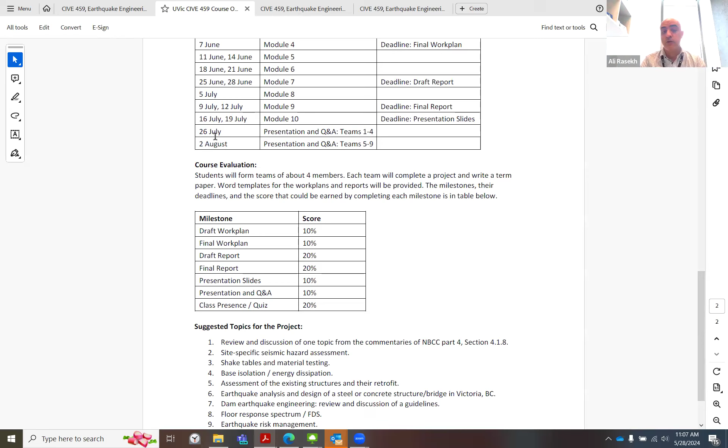Good number of students, thanks a lot, 27 strong, yeah you can say that. Behnam told me that you have chosen from these topics here, so I'm happy that I've given you enough options. Although, as I said, you could even find your own topic.

Right now, we are continuing with module number 2, which is dynamics of structures for multiple degree of freedom systems. Meanwhile, so that you confirm one more time that what we are learning here is valuable, I show you this. About an hour ago, I opened this slideshow from module number 1 that has this equation for assessing the log decrement method. That's the formal name for it, but that's a method for assessing the damping ratio for a system.

Because I have a poor memory, I keep on forgetting whether 2 pi is on the numerator or denominator, etc.

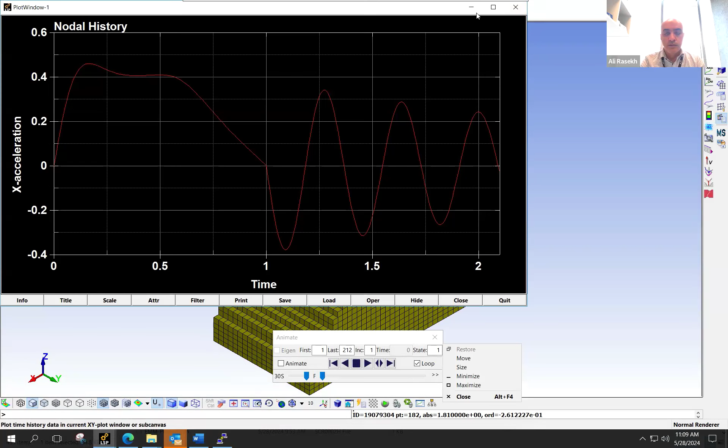So I was reviewing an analysis being done here at HDR. Let me show you here - sorry, it's too busy. This is done by my good colleagues and engineers at HDR. They are modeling a dam. I probably shouldn't say which dam or what we are doing, but it's an earthquake analysis, and this is one block of the dam. We applied damping in different methods to the system, and there is dam, foundation, and reservoir, whatever - the main model is a lot bigger than the one I'm showing here.

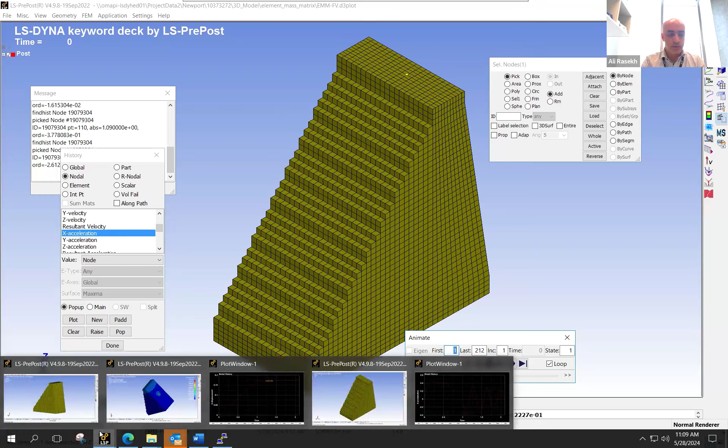I wanted, as a person overviewing this, to make sure they got the damping right. So I did a free vibration test, and the system, as you see, starting from second 1, is vibrating but losing its energy. The energy is dissipated gradually.

Number one, I was interested to see what is the main period of the structure. You see the vibration starts from 1 second. Maybe I didn't explain well - so I output the acceleration on this point on top of the dam. All I did was output the acceleration record on top of the dam after vibration, which means I slightly shaked this model of the dam and let it move, then I outputted the acceleration there.

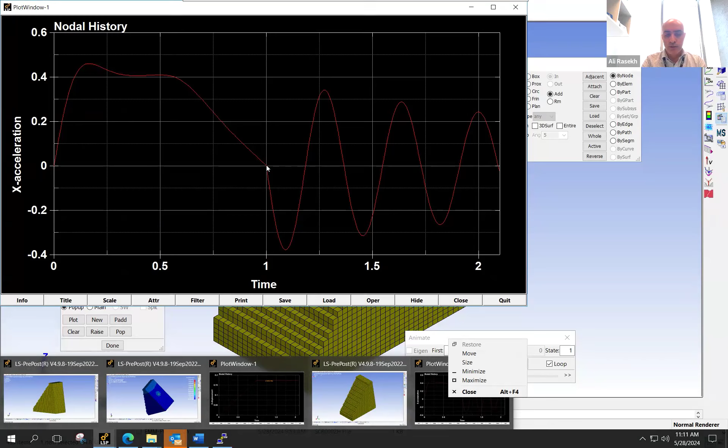I can show it again - that's the acceleration record for a few seconds. So that's the force pushing it that has caused some randomized acceleration. Then there is no force starting from 1 second, no forcing function. It goes back and forth. One complete cycle is...

It finishes at 1.37 almost, so between 1 and 1.37 is one cycle. My back-of-envelope calculation here on a sheet, just given the mass and stiffness of the system, my period was also 0.37 seconds. So that's the kind of high-level check that we do on our models.

Sometimes people call some modeling garbage in, garbage out - that's an extreme word, I never use it in real life, but sometimes it looks fancy and the outcome doesn't make sense. So I do my back-of-envelope calculation here. I get 0.37 seconds, and there was one cycle finishing in 1.37 seconds.

Then what I also do is look at the peak values of acceleration, multiple peak values. I know that equation but I don't have it on top of my memory. So it is a remote system - how can I get rid of it? No, that's your system.

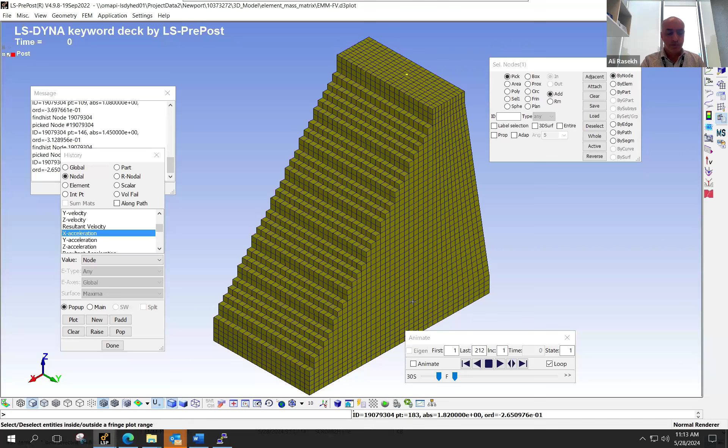Okay, I need another window here, so I will close this if I can.

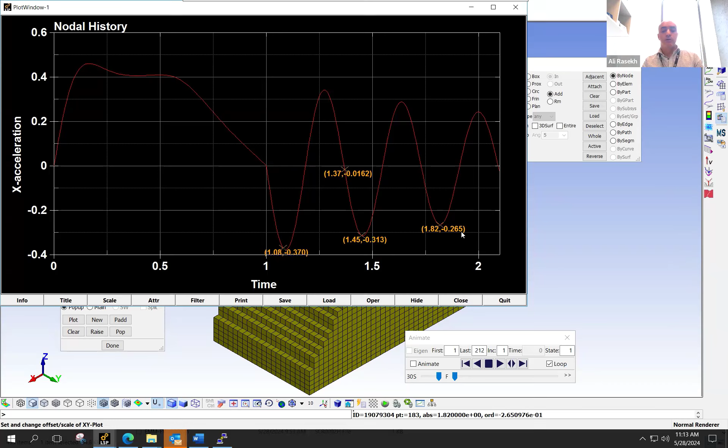I will go back to that screen - what I was saying was that I used the logarithmic decrement solution to also estimate the damping of the system, which was about 2.95%, just by reading some numbers here - I don't exactly read them. I was happy because I was expecting 3%, and if you work out these values in the equation for damping with free vibration, you'll also see they correspond to 3% damping.

I'm using the negative values here, but the absolute value is important. So use the ratio of 0.37 to 0.313, and then use that equation and I should be able to get it.

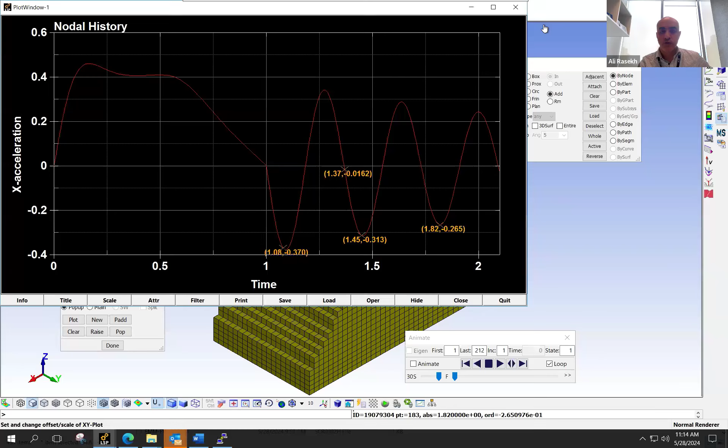How can I get out of this? Okay, let me stop sharing and share again. I think Zoom doesn't make it easy for us. Stop sharing, minimize this, now share again. Right, so I had a bunch of windows on top of each other, I couldn't really manage them.

Back to the story - I pulled out, like right now, my course notes which are also my notes at work, so I don't need books anymore. I've created a good set of course notes for you guys and I use it myself.

I went back to this equation, the log decrement method, and the values I was reading to you were 0.378 - last time I read it myself on my notes - and 0.261 in two consequent cycles. I use this equation for 2 cycles: when you have 2 cycles you divide by another 2. Here it's written for one cycle between i and i+1; if it's between i and i+2, you divide by 2 one more time. And I ended up with 3%.

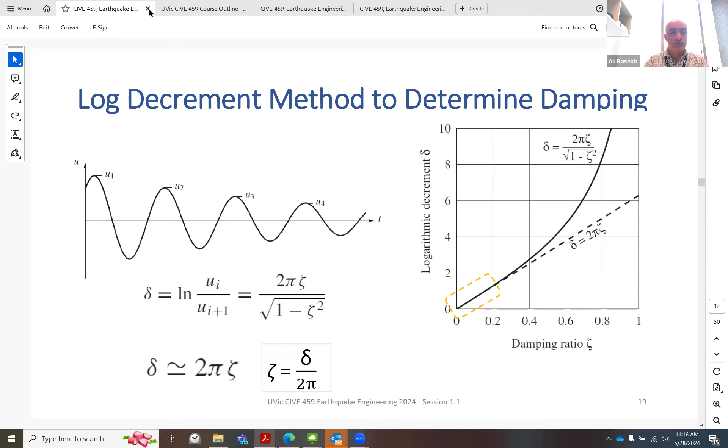Bingo, I'm happy - I think our guys have done a good job, so I can approve of that. So what I'm telling you is that in the age of high-level computing and ChatGPT, etc., still you go to your class notes and use them to verify a solution, which is super important.

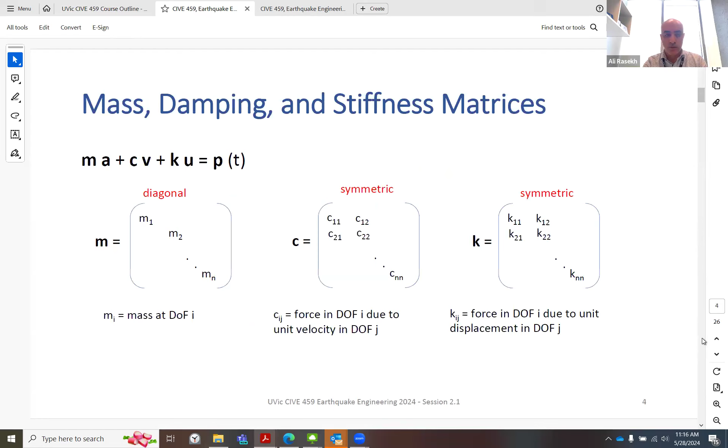Now, last time we went through this. So we visited the multi-degree of freedom systems and explained that at a high level.

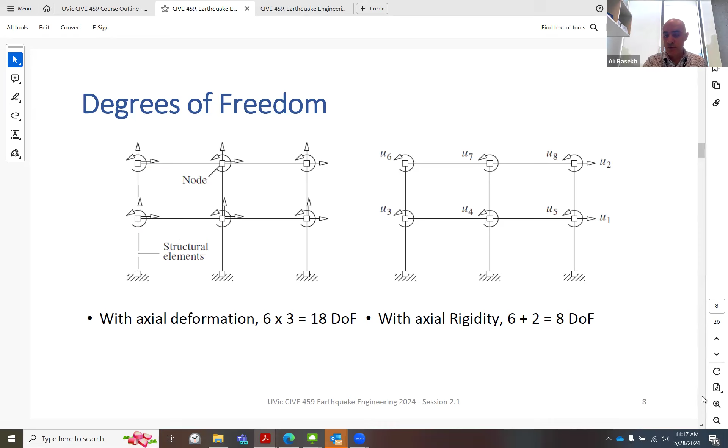Remember that there was a U total. I removed the total because it was not total anymore. So we discussed that although from statics and analysis of structures we are aware of many degrees of freedom in the system, we focus on the ones that are important to dynamic analysis, and use some method, maybe static condensation, to get rid of the unwanted degrees of freedom.

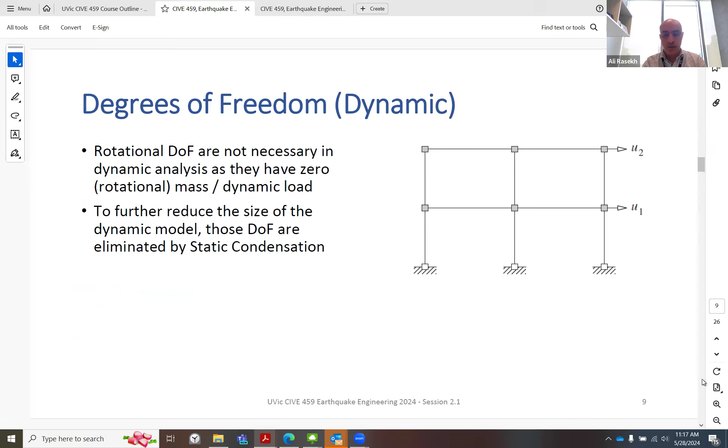Maybe when I was in college, the difference between 20 and 2 was very important, but right now the difference between 2 million and 1 million is important to save computational time. So it's important anyways. I don't generally appreciate it when people in analysis just think we have unlimited resources. The level of resource and computation capacity is increasing, but the demand is increasing twice as fast, and therefore we easily end up, in a way, with mathematical problems that we cannot solve because we get too ambitious and want to run too huge a problem.

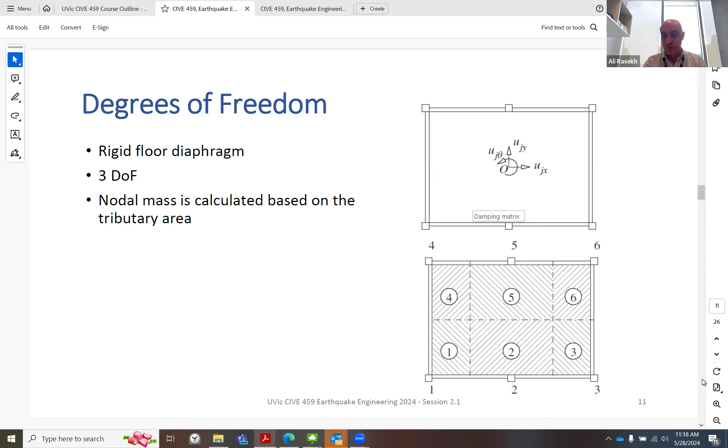Given our resources, we have limited resources, the projects have limited budgets, and at this moment we have 24 cores, which again has some limits. It's not unlimited. So in general, what I'm telling you is that your notes are important and try to at least have a high level understanding of them and practice a little bit, and they will be useful throughout your career.

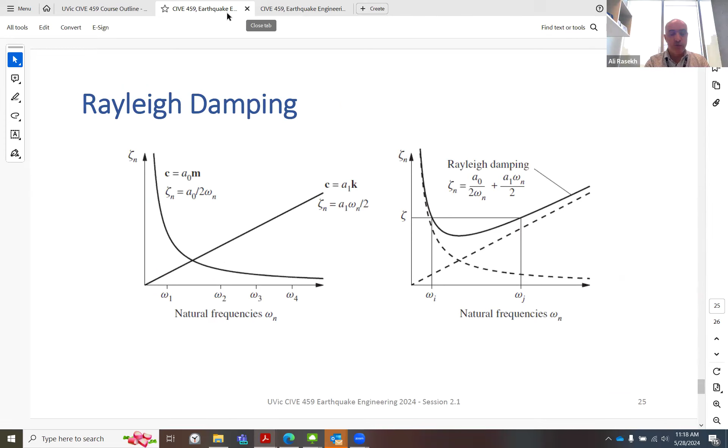I think we stopped here last time, with examples. So we went through all that, and now we are going through the examples. One second, sometimes I miss the chat, but now we can dig into the examples.

Again, slope deflection relations. A structural engineer should always have them in their back pocket, or maybe you just keep my slides for your professional life. It happens that you are worried your computer simulation is wrong and you want to do a hand calculation. Slope deflection relations are a very useful tool.

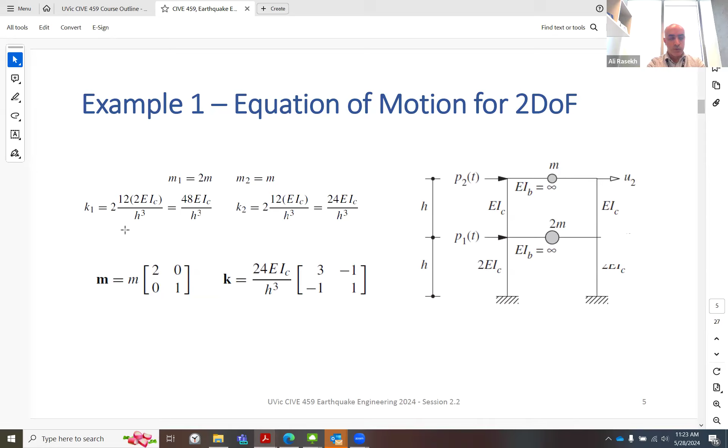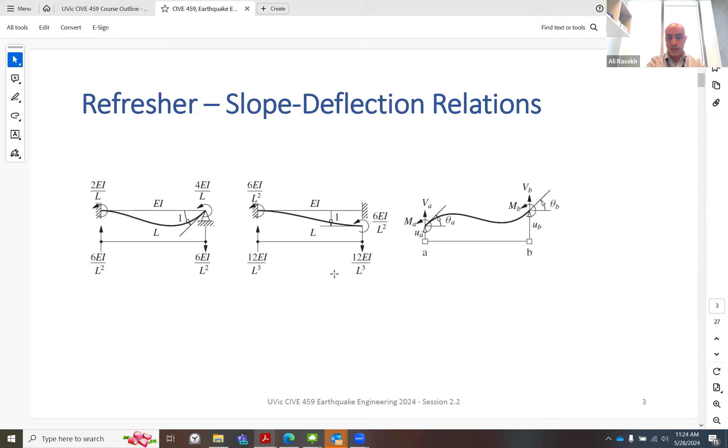The stiffness of the first floor is 2 columns. You can find it quickly from the books, using 12EI over L3 for the stiffness. It is practically the stiffness when the structure moves laterally and there is no rotation at the ends - no rotation here, no rotation here, only a unit deflection, which is identical to what we call a stiffness.

That's for this bottom floor, and this is for the top floor. The factor 2 is because there are 2 columns in each floor. We created the mass matrix quickly, and a stiffness matrix.

I didn't show this in detail, but basically for the first floor, so you can do this exercise - maybe you know it from your analysis of structures course. When you want to get this first term, imagine that all the nodes are closed and only the first floor can move. If the first floor moves by a unit, we have deflection both in this column and in this column, so the stiffness of both columns, first and second floor, are contributing. So 24 EI over H3 here, but 1 time here and 2 times here, so 3 of them.

When you want to get K22, you close this one, and only the second floor can move. Now the stiffness of the first floor is not really contributing, it's only the stiffness of the second floor. Therefore you have the factor 1 here, only the stiffness from the second floor is contributing.

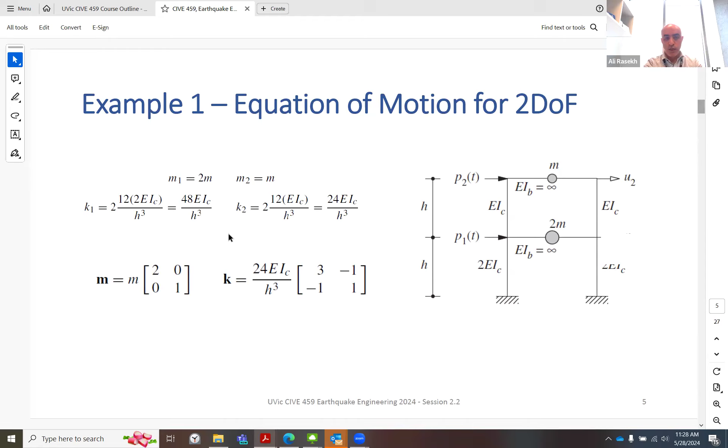Similarly, we simplified by calling the K2 of the second floor to be K, and K1 of the first floor is twice as much. We previously had the values of K1 and K2, and we know that K1 is twice as much as K2 - we're just compacting the symbols.

Same thing we found out: a diagonal mass matrix here, and a symmetric stiffness matrix. So we always expect a stiffness matrix to be symmetric and a mass matrix to be diagonal. There are exceptions, but normally, to the best engineering judgment of a structural engineer, that's always the case - a stiffness matrix is symmetric, mass matrix is obviously symmetric and also only diagonal.

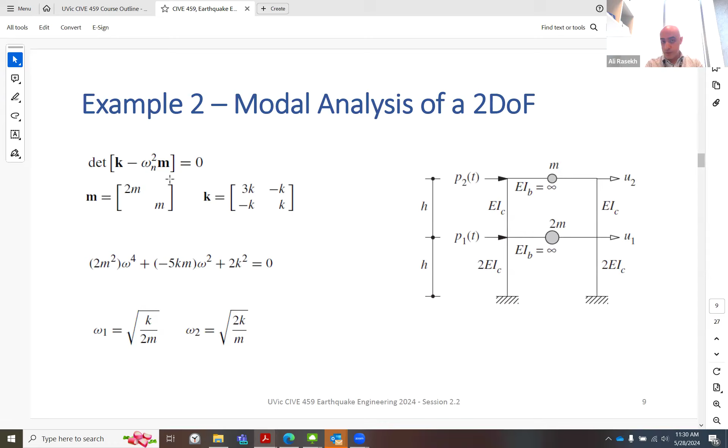Now, if you remember this equation shown by the determinant, that was supposed to help us find the frequencies of the system. So the determinant equation for a stiffness matrix and mass matrix - I expect that you guys in 4th year know a tiny bit of matrix analysis, at least for static purposes. The determinant is also important, but you can just quickly ask your ChatGPT bot to refresh you on that and how to calculate the determinant of the matrix.

And then, as a refresher, even though I don't have it on top of my mind, I can Google search it or ChatGPT it and find how to calculate it. You will end up here.

However, I'm able to validate, so that's very important for engineers because ChatGPT keeps on lying to me on a lot of stuff, but I can figure out which one is correct and which one is not. So you need good judgment. We're still in 2024, we still need good judgment.

Just don't listen to ChatGPT because yeah, I can tell you jokes and examples, but I keep on asking it questions and it gives me something, and then I say really, and then it says no, I made a mistake. So like any of us, I think it's highly trained on human language, and we humans sometimes lie in a way. So ChatGPT does the same thing. Keep your good judgment in interaction with people and also with ChatGPT.

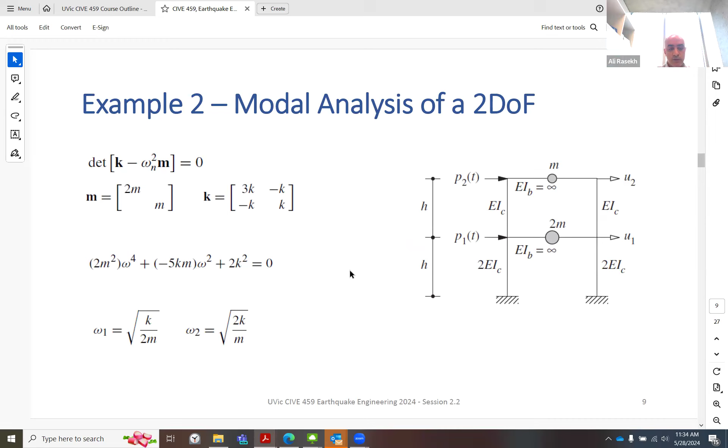And again, I think we described it last time, but maybe one time is not enough for students, for learners, so second time and third time we can just repeat that. Use the determinant equation to get your frequencies. And then when you have the frequencies, you push it back, you put it back into your equation of motion, and now you can calculate the mode shapes related to each frequency.

So this frequency is correlated with this mode shape, and this frequency is correlated with this mode shape. And therefore, we have this first mode, the mode shape. What does the mode shape mean? It means it looks reverse, but really the first degree of freedom has moved by 1/2.

Mode shape doesn't have a unit because it's scalable. What it means is that the second floor moves twice as much as the first floor. Therefore, there's no real unit to it, it might be inches or centimeters or kilometers, whatever. What the mode shape tells us is that the second floor moves twice as much as the first floor, and that's what you can say.

You can see mode shapes in your SAP analysis as well. The second mode had a higher frequency, about 2 times as much. And if you look at the mode shape, it is -1 and 1, so the first floor has moved in a negative direction and the second floor has moved in a positive direction. So again, as I said, mode shapes don't have units, and all they tell us is that they move the same amount in different directions.

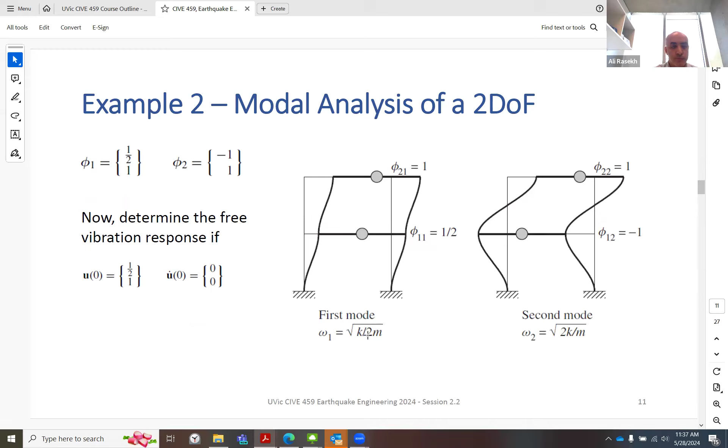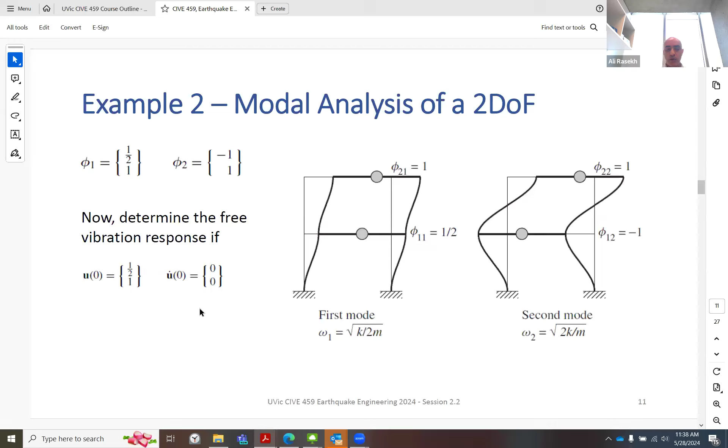Now, if U0 at time 0 -- this is part of the same example, where we want to determine the free vibration response. At time 0, we pushed everything to about 1/2 and 1, very similar to the first mode shape. This practically has units as if we moved the first floor 1/2 an inch and the second floor 1 inch. Then we leave it so it has no speed -- at time 0 we had movement but no velocity, and then we remove our hand and let it vibrate on its own.

Now we know the displacement of the system based on the mode shapes -- we already found it should follow the top equation here, which is the equation for displacement. If you take the first derivative, you get the equation for velocity. So you know the equations for displacement and velocity, but the only unknowns are the a's -- phi 1 and phi 2 are already determined, but you don't know the a's.

Because you have 2 equations and practically 4 equations since it's at two levels, you get 4 equations and 4 unknowns, which can be resolved to get B1 and B2 equal to 0, A1 equal to 1, and A2 equal to 0. So basically anything related to the second mode is 0, and it's moving purely in the first mode.

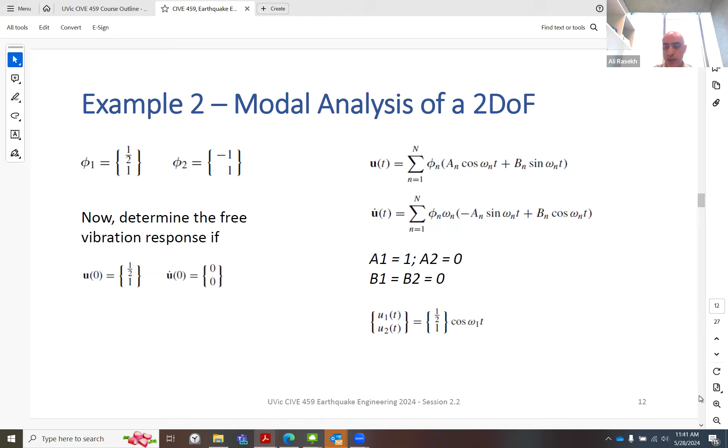I know this is too fast, but I only expect you guys to follow along. That's as much as we can do at a high level for a 4th-year earthquake engineering course, which covers a lot of material. You guys are already very good.

Now we want to once more review what we talked about with Rayleigh damping, and try to assess the Rayleigh damping factors for a 3-story building. The floors here are heavier -- 200,000 kilograms, 200 tons each, with a 100-ton roof on top. The stiffness for all floors is identical, at 1,000 kilonewtons per centimeter.

Already the modal analysis is completed -- using SAP 2000 or your favorite software, you have determined the primary frequencies of the system. The system has 3 degrees of freedom, so it has a total of 3 frequencies. When we talk about the primary frequency, we mean the first one, or if we say primary frequencies, we mean 2 out of 3, because you'll learn through experience that modes with lower frequency have higher effect -- that's why we call them primary.

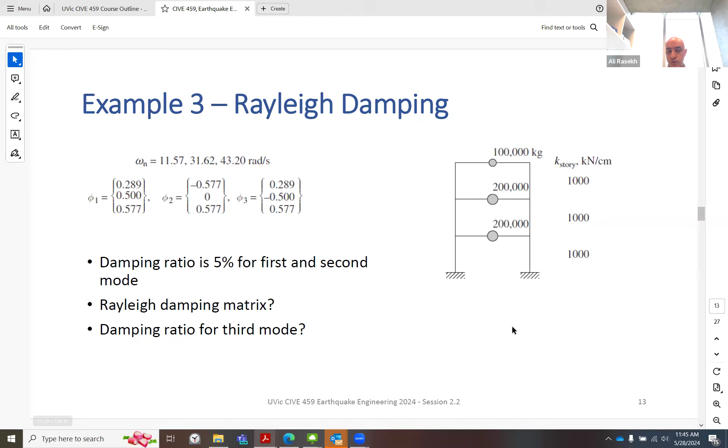Again, we have the mass matrix, which is easy to assemble. The stiffness matrix is slightly more difficult. As I said, when you have a movement in the first floor and the others are restrained, the stiffness of the first and second floor contribute. So you have twice as much.

Similarly for the second floor and third floor, if you have this one restrained and that one restrained, when the third floor is moving, it's only affected by one stiffener column. So that's why no surprise that we have a 1 here. These are the reactions at the other floors when one floor moves, and it's symmetric. Generally looks okay, looks healthy, we can proceed.

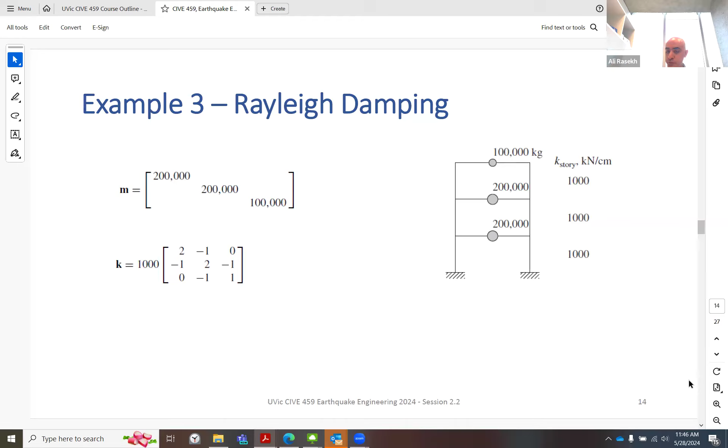Three frequencies were already calculated for us. When we were talking about Rayleigh damping, we said how to calculate A0, which is mass proportional damping, and A1, which is stiffness proportional damping. We had two equations for those.

Omega i and omega j are the frequencies of interest, and we said that the frequencies of interest for us are omega 1 and omega 2. They were inserted in there, and you get A0 and A1. So in a way, your Rayleigh damping is calibrated to the first frequency and to the second frequency.

And you can use the mass matrix, the stiffness matrix, A0 and A1 to assemble your damping matrix. However, the damping ratio is the most important to us.

Repeating the same thing, the equation for damping ratio is set to be 5% for the first mode and for the second mode. However, we should calculate the third mode, and then we can input this value into the damping ratio equation and calculate the damping ratio for the third mode, which is about 6%.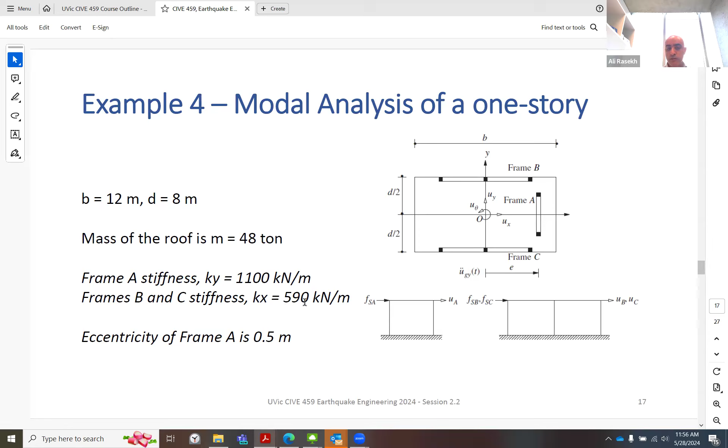All I wanted to check here is that the units are consistent. So 48 tons means 48,000 kilograms, and 590 kilonewtons per meter means 590,000 Newtons per meter. So the units are consistent, and we can just directly insert it in there and get the frequency. The mode shape is easy to imagine: everything is moving together in the X direction.

Now, the Y direction, if we are looking at it here, it's more sophisticated. Force in the Y direction causes both displacement and rotation. Hence, the stiffness matrix should be calculated.

What happens is that we assume we have a uniform roof and the center of mass is at the center, while the center of stiffness is away. It's shown schematically, but I think we were given an eccentricity of 0.5 that is used here. So visually it looks further away, but it's only a schematic, it doesn't have dimension, and this E value is shown in an exaggerated way. It's only 0.5.

Therefore, we have to come up with the matrix. If we prevent any rotation and only move in the Y direction, obviously frame A is providing a stiffness, we already have the stiffness of frame A. If we only allow rotation, we previously went through this exercise, you can repeat it, and you can calculate the rotational part of the stiffness: how much stiffness is provided by frame A multiplied by the distance of frame A to the power of 2, and how much is provided by frame C and frame B multiplied by distance to the power of 2. So you get this equation, and you can calculate the rotational stiffness of the system.

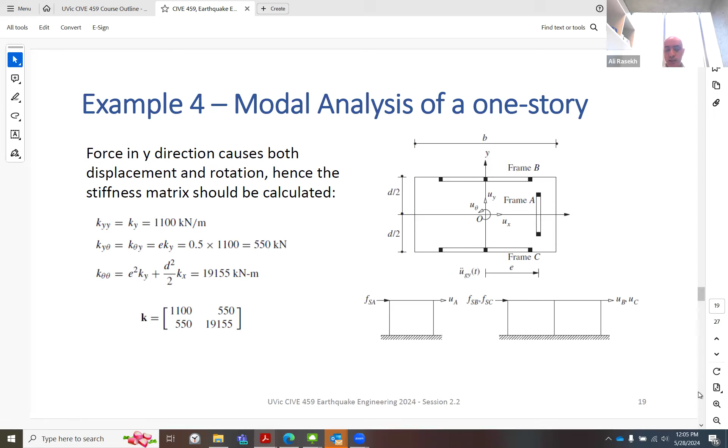Going back to the arguments here, we calculated the rotational frequency as well. So all of them appear to be on the very same order, very close to 5 radian per second. And they are independent from each other: 3 frequencies of the system, independent from each other when frame A is right at the center.

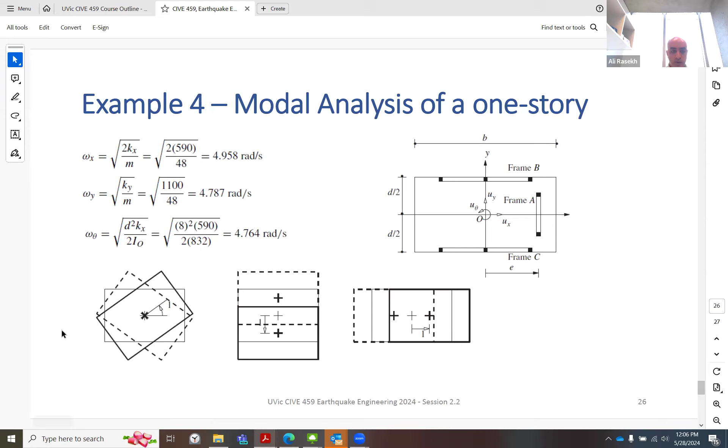And so the X direction displacement was already independent. Y direction becomes independent if frame A is at the center. And again, independently, we will have rotations as well. They don't have interdependency.

Okay, I tried to explain it well and quickly. Apologies for the quick introduction to this topic. You guys will be very good at this when you take the 500 level course in dynamics of structures and go through quite a few exercises. But I thought this was valuable to keep in the course so you have the high-level concept, and you can go back to this slideshow later in your career or grad school tests to validate your work. So that's as compact as it can get in 1 hour and 20 minutes, which is ridiculous, but we did that. Hopefully you learned something.

Now, if there are no questions or discussions, I can give you a few minutes, then we can jump into the next slideshow. Let me peek into my messages, maybe my colleagues are looking for me. Not really, okay, that's okay. Let me jump into the next slideshow. I'm not seeing the comments. I think I have the next one ready.

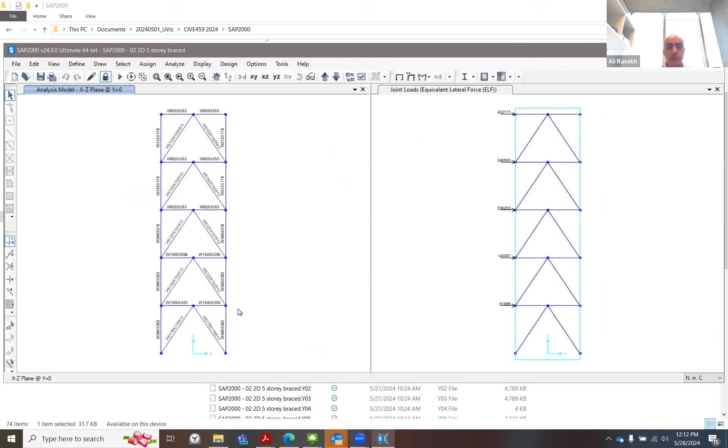Okay, we get the introduction here, and then on Friday we go further. I think I copied this model here and tested it to make sure it's running and everything is fine. I probably have put it on your system as well, but I will double check to make sure it's in there, and whenever I'm uploading the video of today's class.

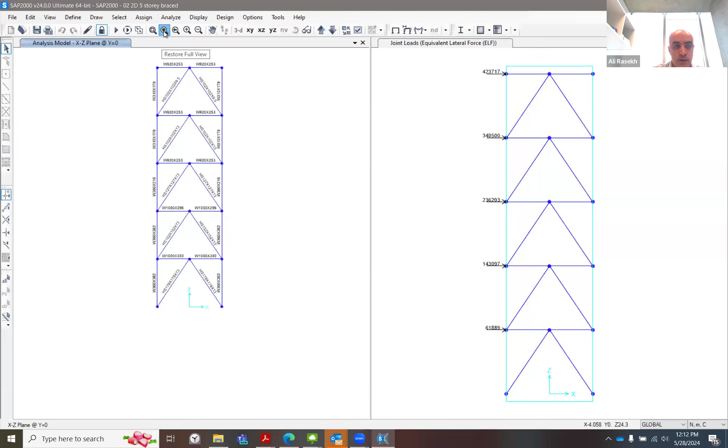So the model is already there. It's good for you guys to inspect a model which is already prepared and learn from it — I don't even say it's prepared by me, I modified it a lot last year, but it was prepared by previous teachers. Everybody's viewpoint is different, every teacher, every engineer thinks differently, so I did plenty of modification based on what previous teachers of the course had provided. So basically, you have this model, and we will do some test runs on it.

Finite element model, frame model. This is like a 5-story structure, so even more degrees of freedom than the 2 degree of freedom structure we studied through the examples. And generally we even allow the nodes to move in, at least in the planar direction. We allow them to move and rotate in 3 directions, that would be 2 movements and 1 rotation. So this structure in general has a lot more than 5 degrees of freedom.

Because the computer does the hard work for us, we are not too concerned about defining a few hundred, or less than 100, degrees of freedom. Your computers at home and in the office are a lot more capable than that.

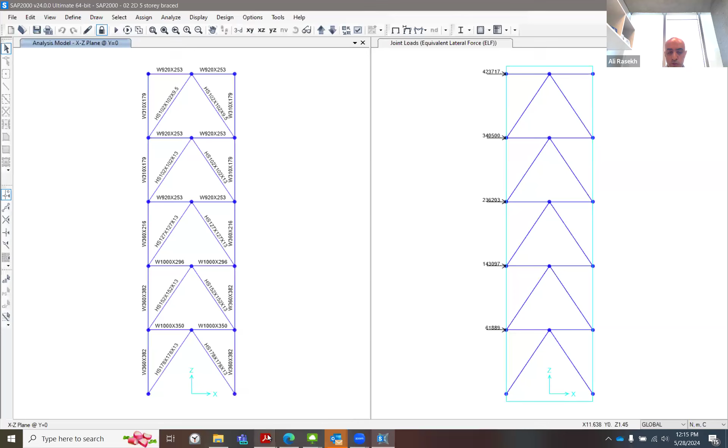That's the structure that you have. Back to the slideshow here.

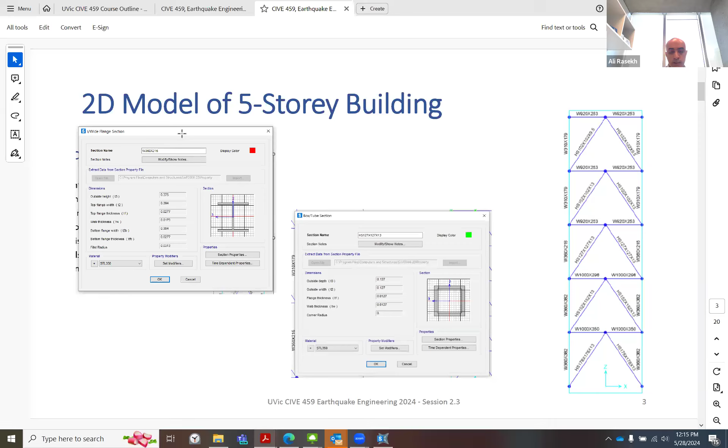I have tried to emphasize one more time the section property, W section, or sometimes we call it I section because it resembles the letter I of the alphabet. So this W section is for beam or column, typically defined in SAP2000. HSS section typically defined in SAP2000.

And when you become more fluent with using SAP2000, you can use the databases there. A lot of the information in the manual of steel construction in Canada, or the similar one in the US, is accessible in SAP2000. And I believe there are lots of European, Japanese and other codes accessible. The most important for us is Canadian and US profiles are in there. So you just go to the database and add it, and all the section properties come in easily based on the name.

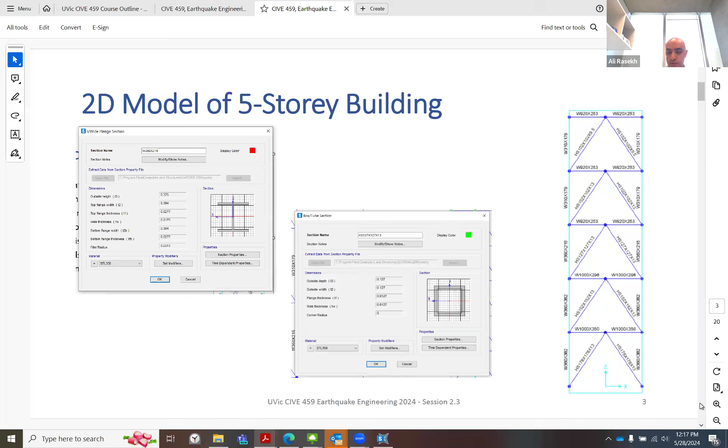And another one is inches, 2.54. So you don't want to memorize everything, but these things repeat so many times, especially for a person like me. I switch a lot between Canadian projects and US projects, and in Canadian projects you need imperial as well. So I recommend being comfortable with that. It sounds weird, but it's not too difficult to jump between the two systems.

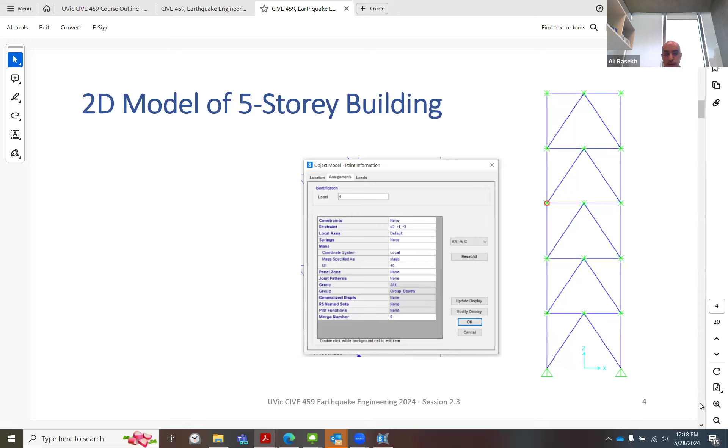Basically, so for the assignments, when I receive a model prepared by others or junior engineers, SAP2000 allows you to just right click and see some of the properties at each node. So it's a quick way of checking and even modifying. We have restrained anything out of plane for all the nodes because we are only interested in the X direction pretty much, and in plane, so U2 in the Y direction, which is out of plane, we have restrained it.

Rotations around axis 1 and axis 3 are out of plane, so we have restrained them, because number one is computer time, which we said is not super important now, but number two is that we don't want unwarranted modes of vibration, etc., that we are not even interested in. We don't even provide support in the Y direction, so we restrain it, we are not interested in them.

And masses applied to each joint are also shown here. But we will discuss further about this model. This is one of the most important things you learn this term: how to use SAP2000 and similar software for dynamic analysis.